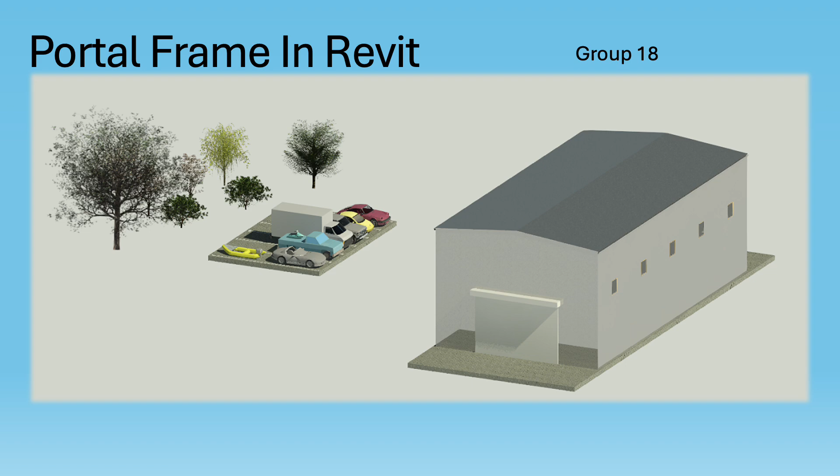Our structure spans 14 metres with a total building length of 28 metres and eaves height of 10 metres. The base is a 400mm thick reinforced concrete slab extending 200mm past the walls and 5 metres at each roller door side, providing forklift and vehicle access.

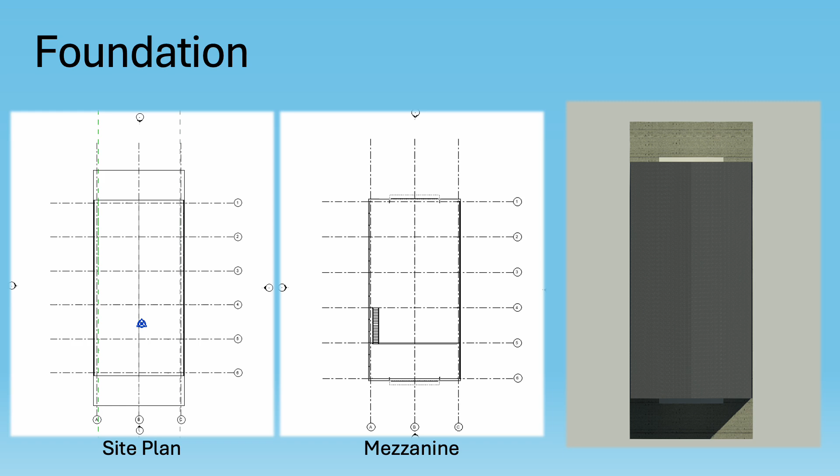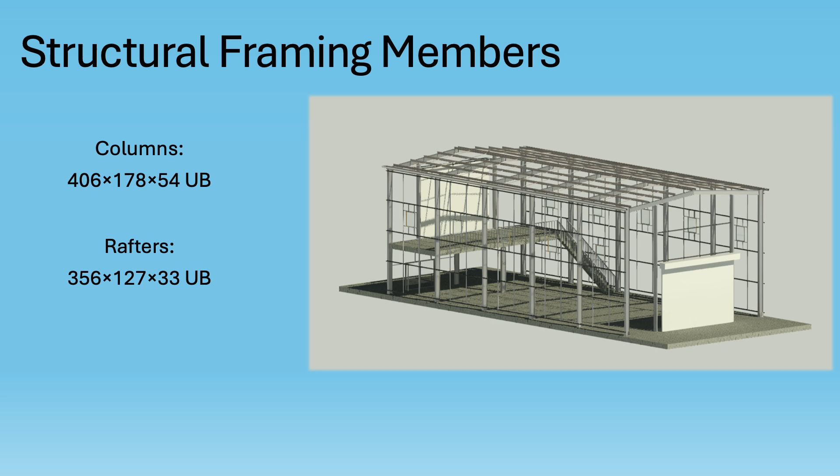The portal frame uses 12 restrained columns paired with rafters. Each frame is spaced at 5,600mm, giving a uniform load distribution across the 28-metre length. All members use standard Revit families duplicated for cleats and base connections, ensuring accurate detailing for future structural analysis.

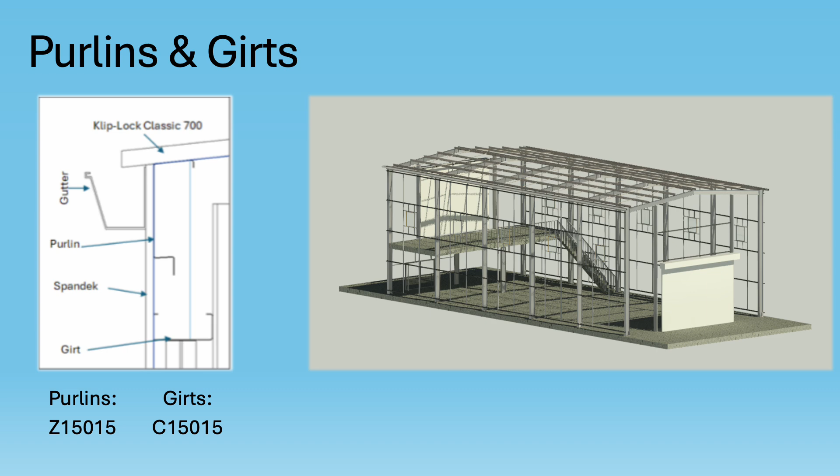The roof frame uses Lysaght purlins spaced at 1,420mm internally and 1,800 at the ends, well within the Klip-Lok Classic 700 limits. Matching girts provide wall support with bridging angles added for torsion restraint, improving stiffness and preventing section rotation.

The roof uses Klip-Lok Classic 700 sheeting at a 6-degree pitch, which is above the manufacturer's minimum for efficient drainage. Walls use Spandek cladding, giving durable and fast installation. We included 10 fixed windows for daylight and 2 roller doors for cross-ventilation and equipment access, one at ground level and the other at mezzanine height for forklift loading.

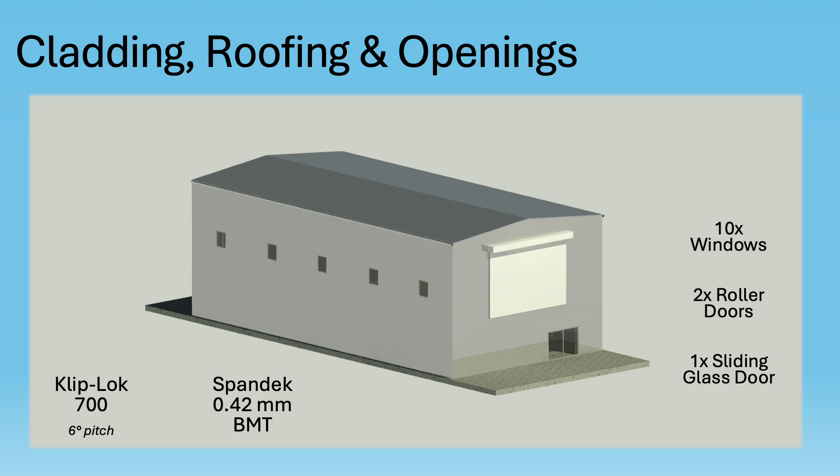The mezzanine floor sits 4 metres above the ground with an 8 by 5 metre platform, accessed by stairs surrounded by safety railings. The elevated roller door enables forklifts to load materials directly onto the mezzanine, improving internal logistics and vertical storage efficiency.

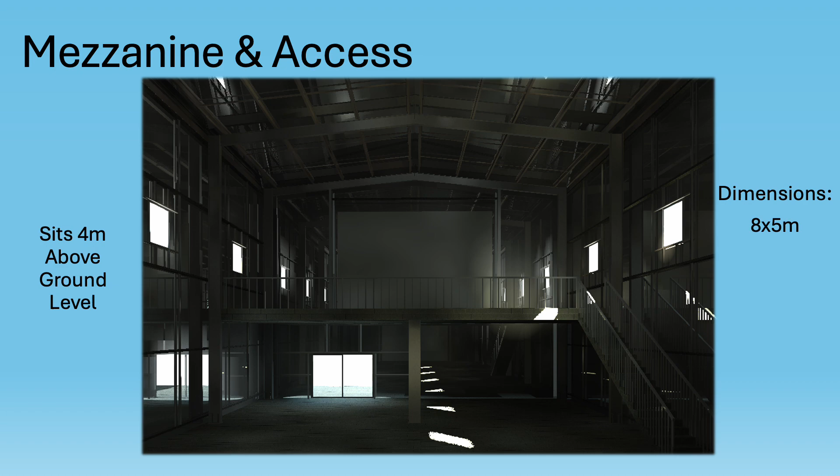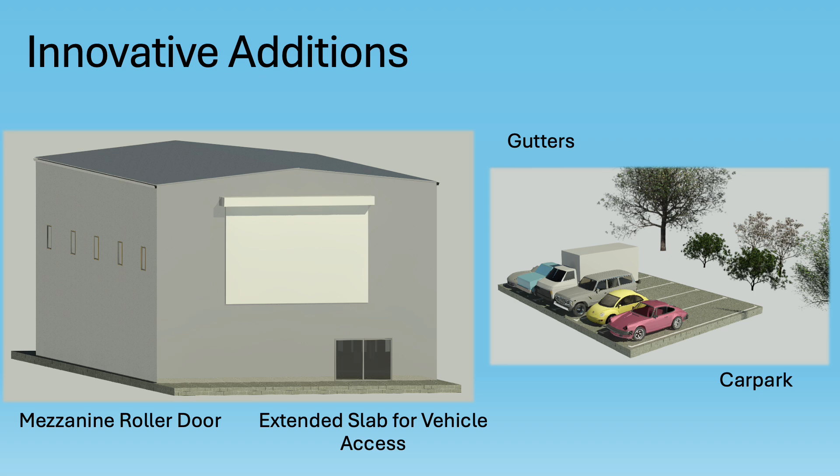To add value beyond the brief, we introduced several innovative components. Roof gutters and downpipes manage stormwater effectively, protecting the cladding. A mezzanine level roller door provides forklift access for upper floor loading. The slab apron was extended to create a durable working zone, and an external car park adds safety and convenience for staff and visitors. These inclusions improve drainage, accessibility, and overall functionality.

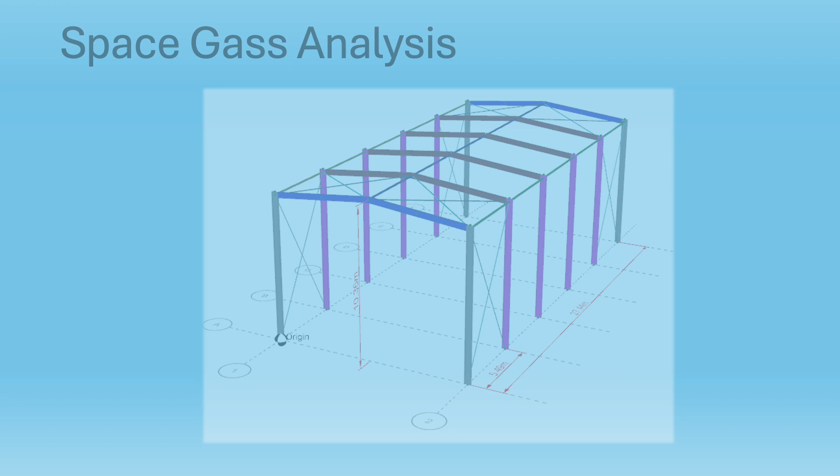Additionally, we used Space Gass to assess how the portal frame would perform under specific design wind loads, as well as test the deflections, shear forces, and bending moments for both pinned and fixed conditions. The structure was designed for the Wollongong Sydney region, which under AS 1170.2 falls within region A2. This means we consider a design wind speed of up to 155 km per hour. These wind loads were applied to test the frame's response under realistic site conditions.

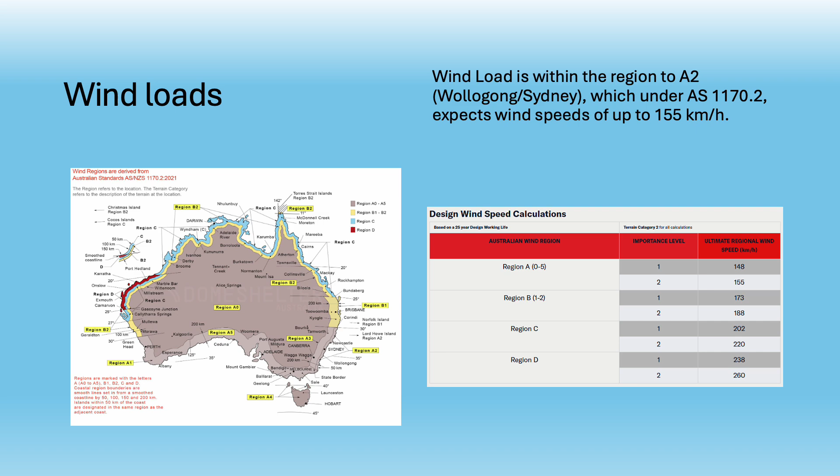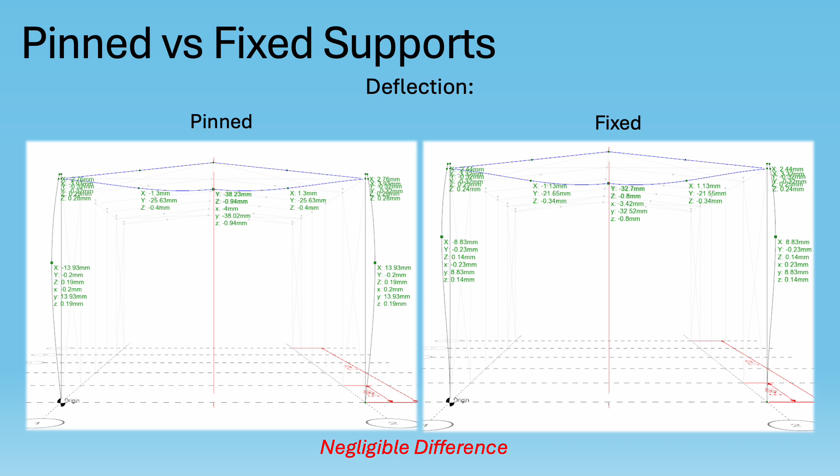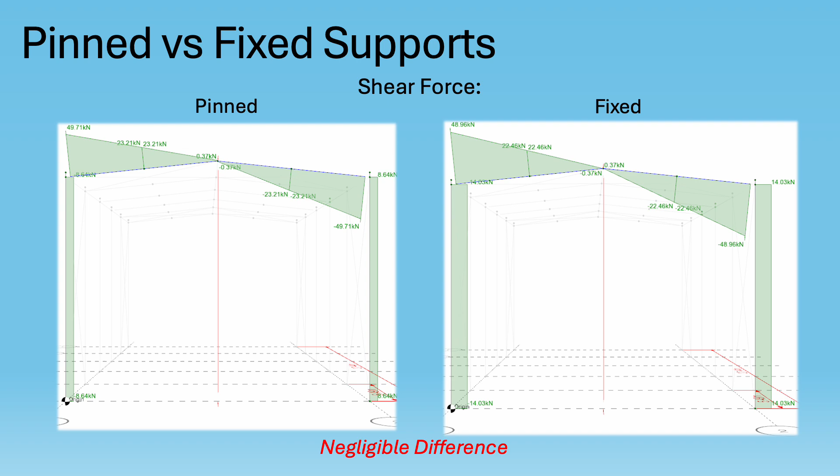When comparing pinned and fixed supports, the analysis showed negligible differences in overall deflection. This indicates that the portal frame is structurally rigid and well braced, maintaining stability under lateral wind forces. For shear forces, results were again quite similar between pinned and fixed bases. This demonstrates that the shear demand on the members is consistent and within acceptable design limits for both boundary conditions.

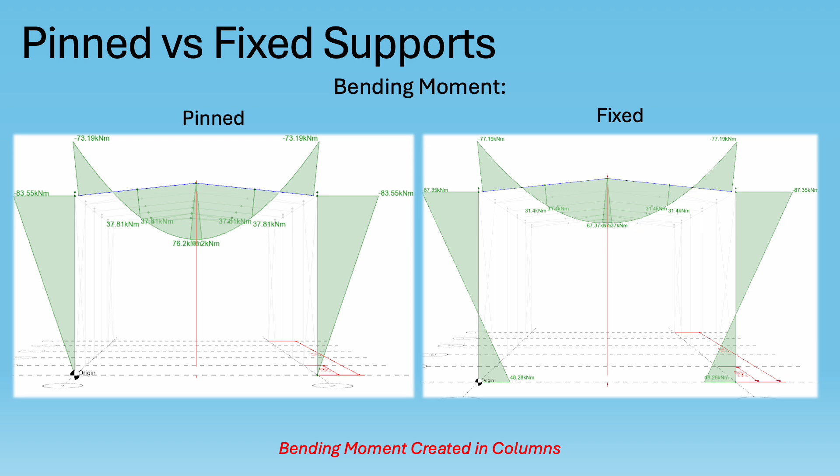In terms of bending moments, the key difference occurs in the columns. With pinned supports, the columns experience minimal moment, while with fixed supports, moments develop at the base, improving rigidity but increasing design demand on the base plate. The base plate uses a 450 by 22 by 20mm plate with 4 M20 bolts. All tension, shear and weld checks pass successfully with a utilization ratio of 1.79, indicating full but safe use of the section's capacity.

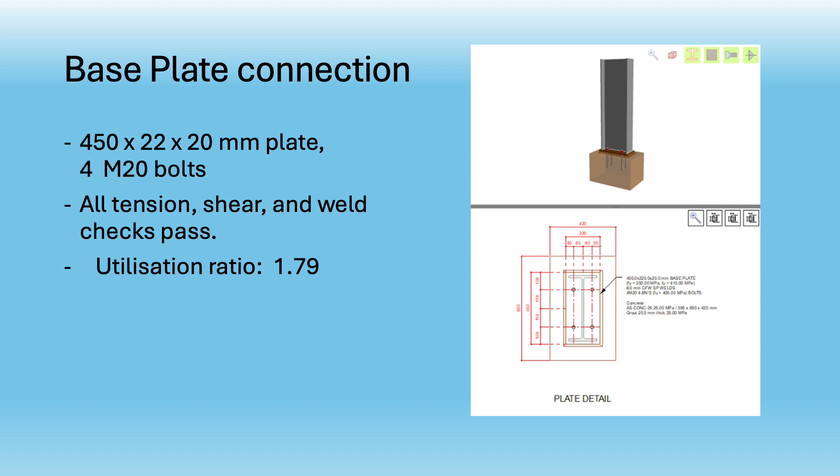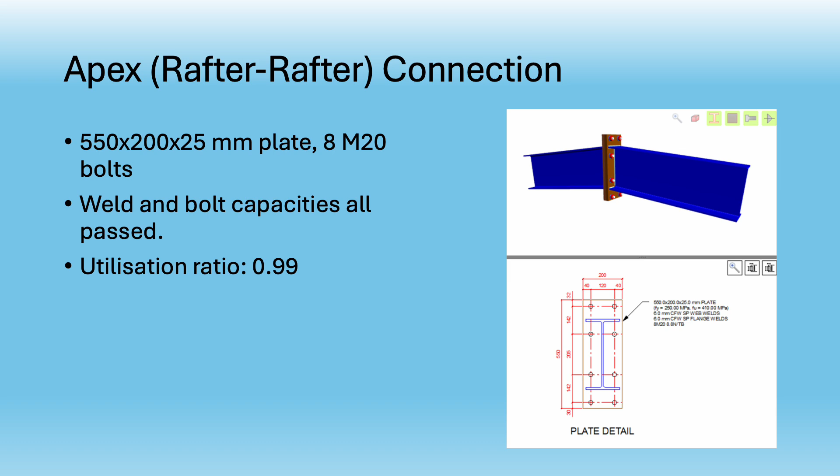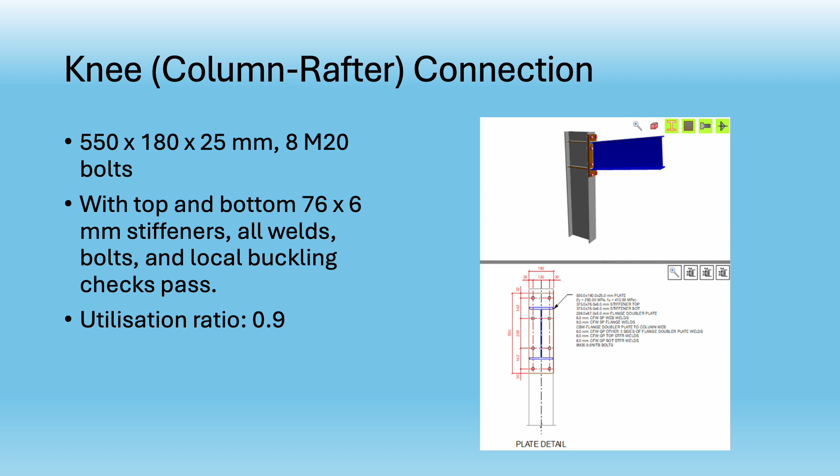At the rafter-to-rafter apex connection, a 550 by 200 by 25mm plate with 8 M20 bolts was used. Both weld and bolt checks passed with a utilization ratio of 0.99, almost perfectly optimized. The knee connection, where the column meets the rafter, used a 550 by 180 by 25mm plate with 8 M20 bolts. Stiffeners of 76 by 6mm were added to control local buckling, and all checks passed with a utilization ratio of 0.9.

In summary, the Space Gass analysis confirmed that the portal frame is structurally efficient and compliant with the relevant design standards. Both pinned and fixed cases performed well under wind loads, and all key connections met strength and serviceability requirements.